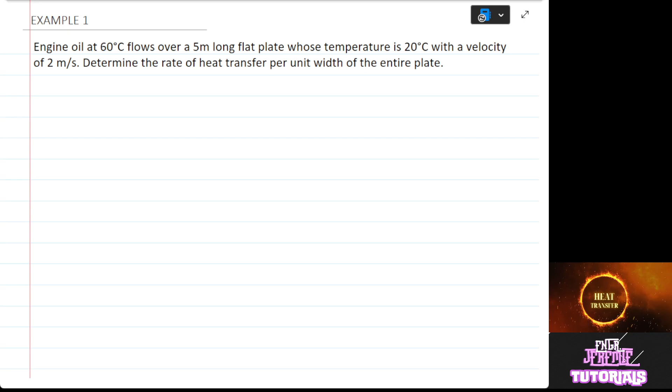So here is our first example. Engine oil at 60 degrees Celsius flows over a 5-meter long flat plate whose temperature is 20 degrees Celsius with a velocity of 2 meters per second. So determine the rate of heat transfer per unit width of the entire plate.

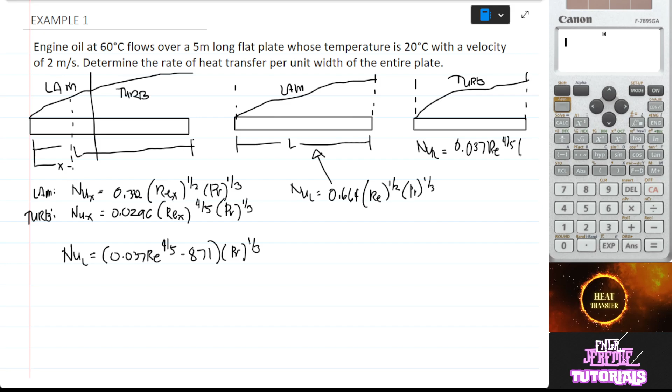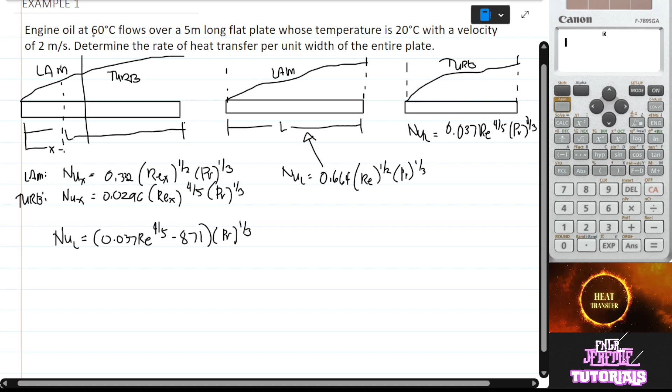And yung NUL naman natin kapag turbulent lahat, yung magsisiro lang yung 871, 0.037 RE raised to 4/5 times PR raised to 1/3. Okay? So, yan yung if turbulent lahat all throughout the flow natin. Now, let's use these formulas para masagot yung sample problem na to. Dali natin siya sa baba.

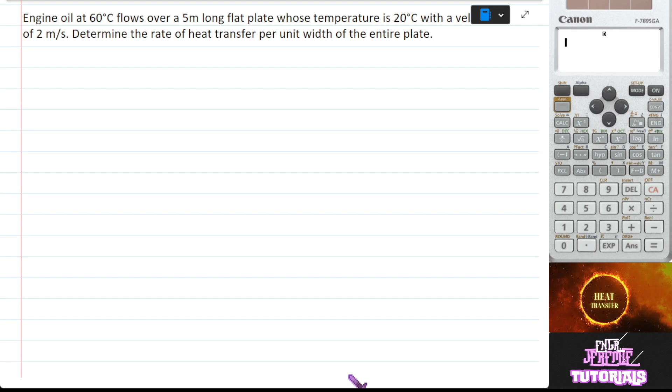Okay. So, engine oil at 60 degrees Celsius flows over a 5-meter long flat plate whose temperature is 20 degrees Celsius with a velocity of 2 meters per second. Now, determine the rate of heat transfer per unit width of the entire plate.

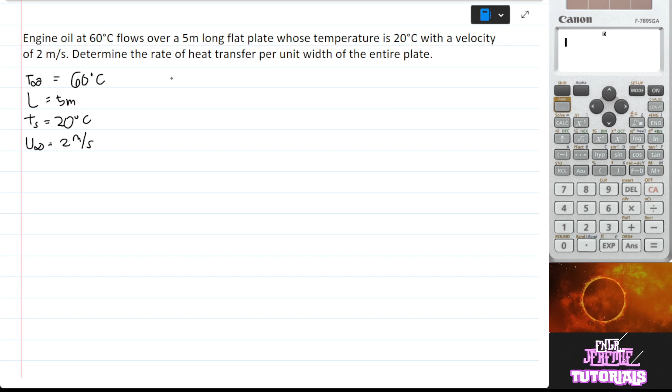So, ang rini-require is the rate ng heat transfer per unit width. Okay? So, we all know that the rate of heat transfer using convection is HA delta T. This time, since ang area natin is plate, ang area is length times width times delta T. So, itong width, dalhin lang natin sa baba. Q over W is equals to H times L times delta T. So, ito yung formula na gagamitin natin to solve for the rate ng heat transfer per unit width.

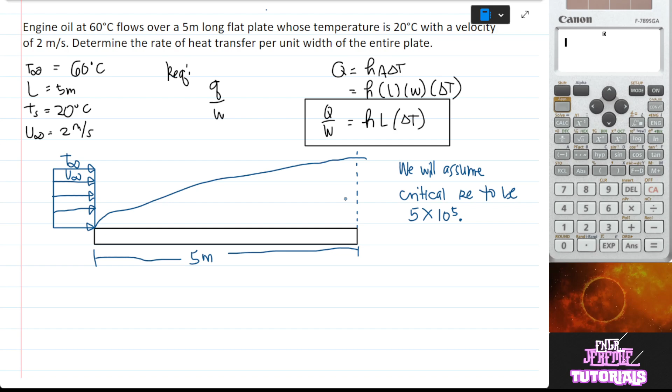Yan. We will assume dito, this time, at length L, we will assume a critical Reynolds number to be 5 times 10 raised to 5. So, therefore, at a length of 5 meters, kailangan muna natin malaman kung ano nga ba yung type of flow na nangyayari dito sa dulo. But, we don't have the properties of oil.

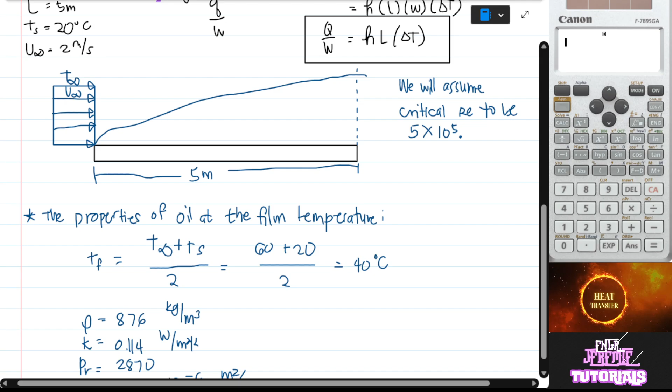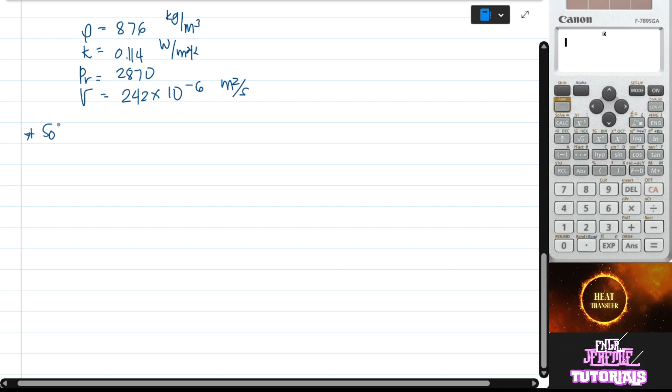So, since nakuha na natin to, determine muna natin kung ano nga ba yung Reynolds number dito sa dulo ng plate. Ano nga ba yung Reynolds number natin dyan? Now, to solve for Reynolds number, solve for RE at L is equals to 5 meters. Di ba sabi natin, RE is equals to density U infinity L over the dynamic viscosity.

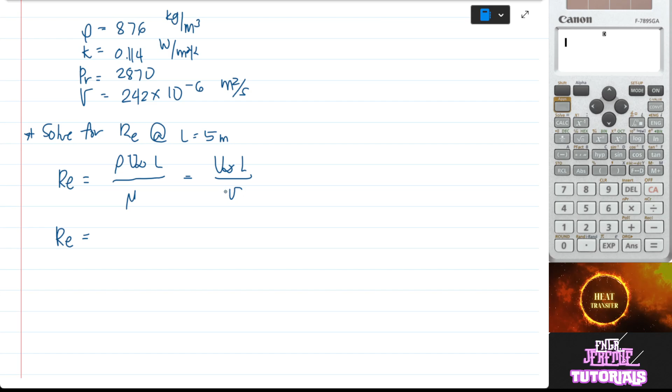Okay? So, since wala naman tayong dynamic na given, itong density, ibaba natin yung isang formula: U infinity L over the kinematic viscosity. So, let's substitute the values ng mga nasa equation natin. So, RE is now equal to what is our U infinity? U infinity is 2 meters per second. 2 meters per second times yung length natin na 5 meters all over the kinematic viscosity na 242 times 10 raised to negative 6 meters squared per second.

So, kung napansin nyo, itong meter squared, ika-cancel yung 2 meter at saka yung isang second dito is ika-cancel out yung isang second. So, we can solve for the Reynolds number: 2 times 5 over 242 times 10 raised to negative 6.

Okay, so itong E dito, that is equivalent sa times 10 kung nakakasyo kayo. Or pwede rin naman natin i-type na times 10 raised to negative 6. So, that is 41,322. So, yung Reynolds number pala is 41,322 at L is equals to 5 meters.

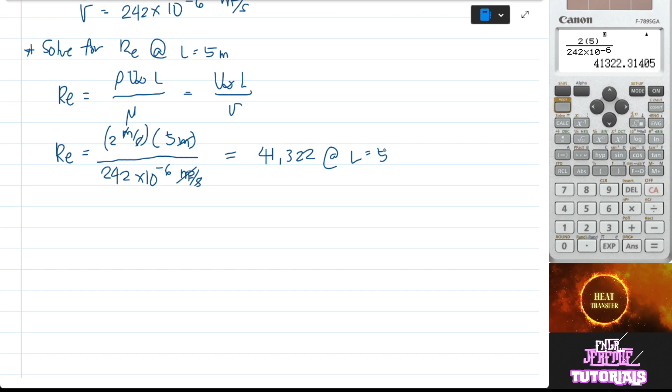Now, kung kukunin natin yung comparison, 41,322 is less than 5 times 10 raised to 5. So, therefore, at L is equals to 5 meters, flow is laminar. Meaning, dun sa dulong part ng plate, laminar pa rin siya. So, simula sa simula hanggang sa dulo, laminar siya lahat.

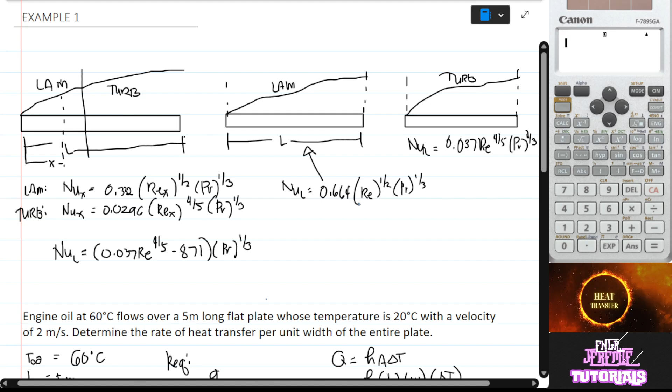Use the NUL for laminar. So, di ba sabi doon, NUL is equals to 0.664 RE raised to 1/2 PR raised to 1/3. So, that is equal to H bar L over K of the fluid.

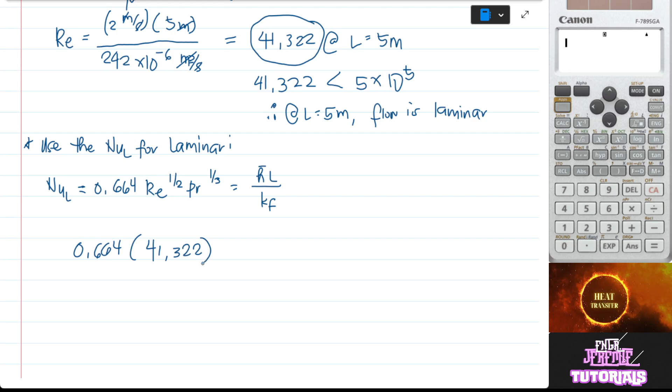0.664. Ang RE natin is 41,322 raised to 1/2 times PR. Dun sa properties natin kanina, PR is equals to 2870. So, PR is equals to 2870 raised to 1/3 is equals to H times length ng plate, 5 meters, over KF, which is, nandito rin sa property, 0.114 watts per meter degree Kelvin.

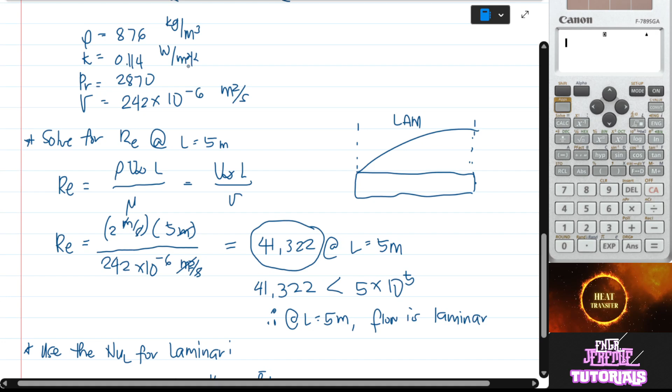0.114 watts per meter degree Kelvin. So, kung papansinin nyo, ang matitira na lang dyan is H. Ang unit is magiging watts per meter squared degree K. So, using our calculator, let's solve for H.

0.664 times 41,322 raised to 1/2, close. Our PR is 2870 raised to 1/3. So, equal daw yan sa, ilagay natin yung H natin as X, times 5 meters over 0.114. So, let's try shift solve.

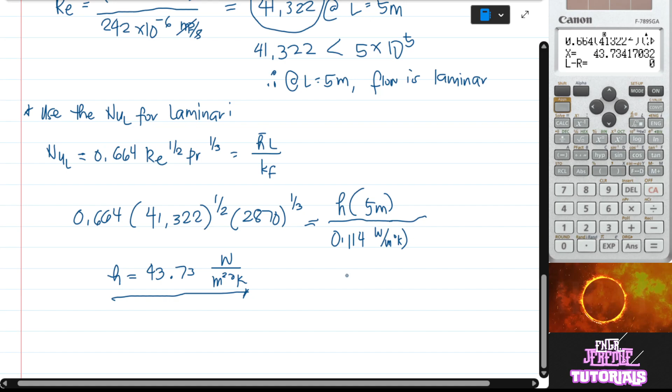Hintayin lang natin. Okay, so makukuha natin yung H natin at 43.73 watts per meter squared degree K. Pero hindi pa lang yan, since ang hinahanap is yung rate ng heat transfer per unit width. Pero okay na kasi nakuha na natin to. Given naman to and this is also given.

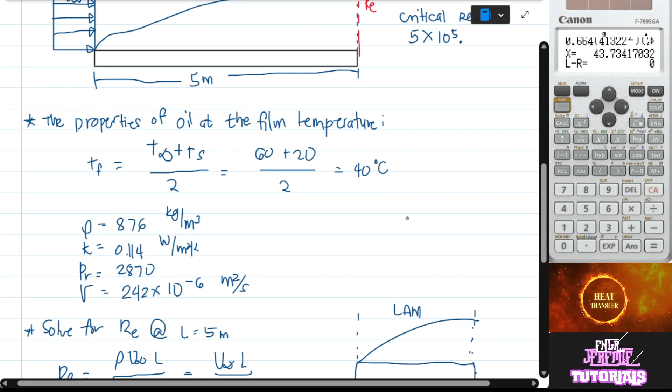So, solve for Q over W. So, Q over W or rate ng heat transfer per unit width is equals to HL times T infinity minus TS, since mas mataas yung T infinity natin. So, H is equals to 43.73 watts per meter squared degree K times yung length natin na 5 meters times T infinity na 60 degrees minus TS na 20 degrees Celsius. So, ika-cancel out ito, and yung isang meter, ika-cancel out yung isang meter. So, naiwan is watts per meter ang unit natin.

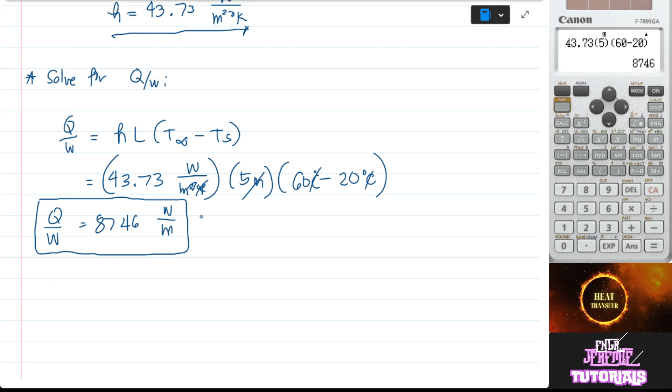So, use calculator. 43.73 times 5 times 60 minus 20. Press equal, makukuha natin siya at 8,746 watts per meter. Ito ang hinahanap na rate ng heat transfer per unit width. Okay? So, yon yung isang problem natin about convection heat transfer.